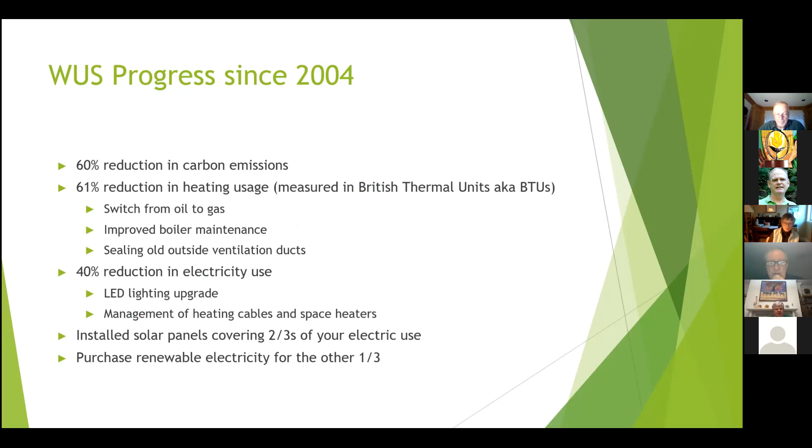Of course, you've got your solar panels covering about 2/3 of your electric use, and you've purchased green energy, 100% renewable, for the other 1/3. So great stuff. You already got the preview of that. So congratulations. Really terrific work you've done so far. So I hope you all feel very good about that and feel that the effort you've put into it has really accomplished a lot, because it has.

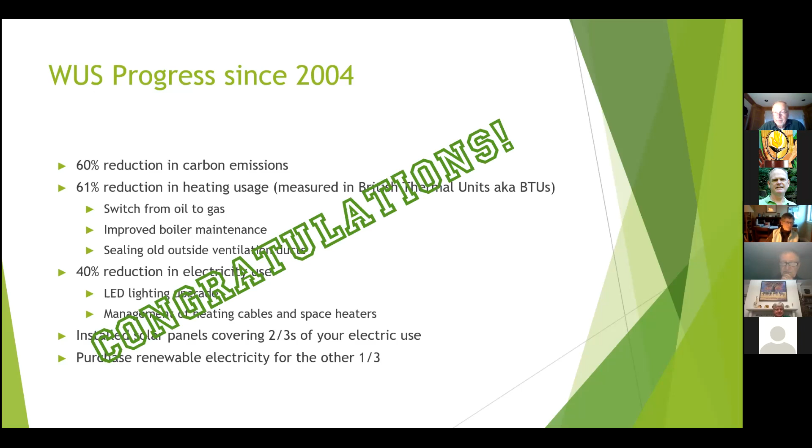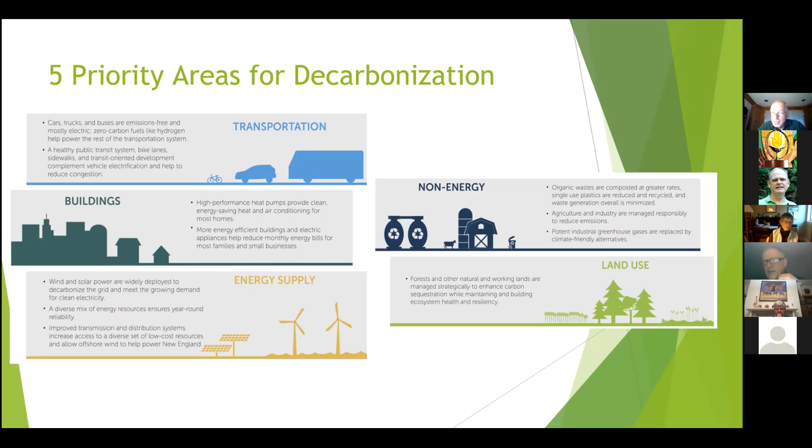And in the report, it specifies these 5 priority areas to focus on. How do we decarbonize transportation, buildings, the energy supply, non-energy uses like agriculture, and then how do we sequester carbon for that amount that we're not able to get 100% to renewable, but then we want to offset that by sequestering carbon or having more forests to take carbon out of the atmosphere, things like that.

So these key principles that apply across that: how do we transition all of these energy users away from fossil fuels and toward renewables? How do we get more efficient with our use of energy and flexible, so that, one of Governor Baker's real focuses is how to do this in a way that is affordable and doesn't hurt the economy. So his idea is let's have a little more flexibility so that we can find cost-efficient ways to do things.

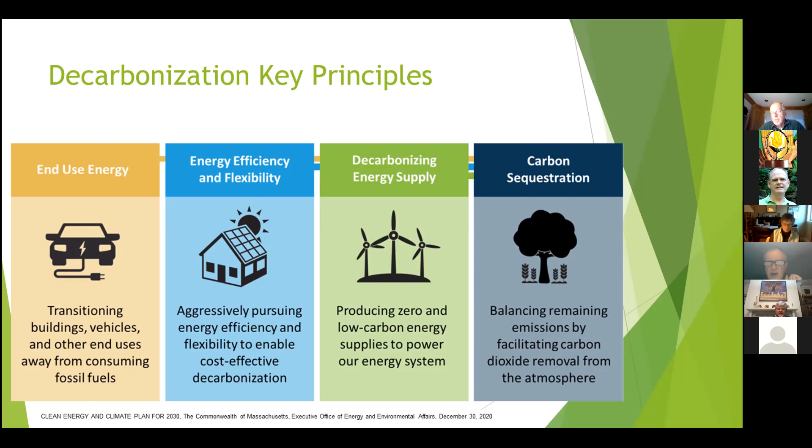Decarbonizing the energy supply. So the electric grid, going to low carbon energy, and the approval that the Biden administration gave to Vineyard Wind will certainly be a big boost toward that. That will be an exciting project. And then finally, carbon sequestration. So for whatever we're not able to reduce through all these other things, find ways to remove that carbon from the atmosphere, whether it's trees or whether it's a technology that extracts it and takes it out of the atmosphere.

And then, of course, we're going to focus mostly here on buildings. And in the report, it notes 27% of statewide emissions come from residential and commercial buildings. Key principles and actions here are the electrification of space and water heating, which the report recognizes as something that's low risk, cost effective, a solution that is in the market now and becoming more and more common. Investing in envelope efficiency, i.e. better windows, better insulation, so less of the heat leaks out of the building as you heat it up.

And to me, this was a really important statement. I'm seeing a lot of talk lately about things like renewable gas or biogas, and we read some about biomass plants and things like that. And I thought it was interesting and important that the Baker administration recognized that, yeah, there'll be some of that available, but there won't be enough in order to achieve the net zero goals. So for the most part, the use of gas for building heat needs to start declining soon, and decline very quickly.

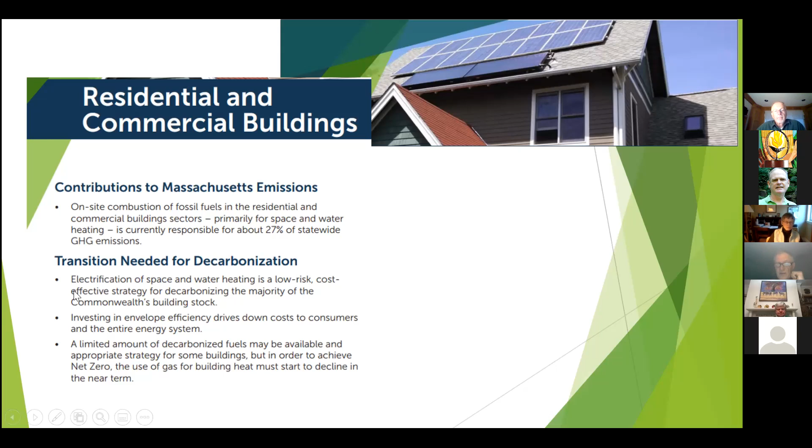And the end result of this is this vision of, I think, that world that the Unitarian statement also pointed to, where the air will be cleaner and healthier for everyone in the Commonwealth. Homes will be more comfortable and more efficient with this electric heat pump heating and cooling technology. Vehicles will become electric, reducing air and noise pollution. And all of this will create good jobs and give people not only a good paycheck, but I think a good purpose for the work they do.

I'll pause there before we get into things on the report. Any comments, questions, reactions to this direction that the Commonwealth's taking?

We're applauding it. We're not represented too well tonight, but a few of us and many others in the church are part of the Metro North node of 350 Mass Action. So they focus on state policy to accelerate environmental progress. And so many of us have met with state senators and representatives and written letters, in order to raise the bar, but also to promote policies that'll make it easier for institutions and individuals to actually meet the higher bar. And now we have that.

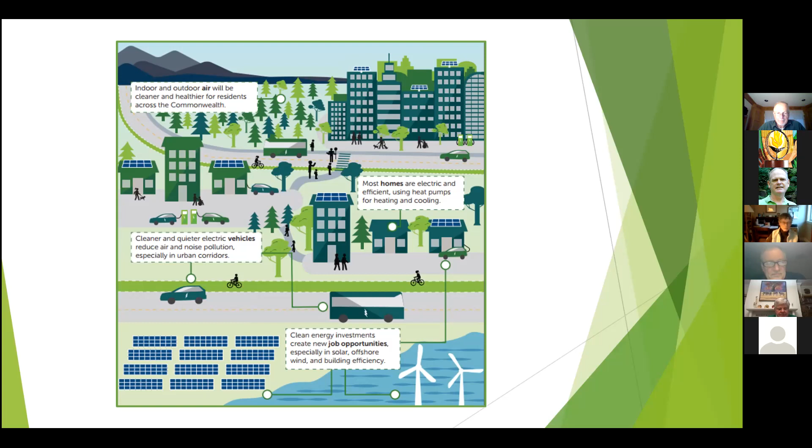All right, well, let's dive into some of the work that you did. And I guess either my agenda is out of order with my slides or my slides are out of order with the agenda, whichever you want to consider it. But we'll start on these short-term actions.

And it's been a couple of years anyway since you've had a Mass Save assessment. I'm sure you had one when you did the lighting upgrade, which I think was 2018 or 2019, and you can do them every 2 years. The Mass Save assessment will look at a narrower set of things, but there will be overlap with this report. And obviously it's necessary to qualify for the various incentives and rebates that the Mass Save program can give you.

So I know I was talking with Chuck. He was talking about looking at a more sophisticated thermostat and heat control system. So I encouraged him to make sure to get that Mass Save assessment and get some money from Mass Save to help fund that. The installation, Jim, sorry to interrupt, of those Wi-Fi thermostats started today. Oh, great. Well, go ahead. Exciting. Woohoo!

Just wanted to say real quickly on the Mass Save assessment that some people say, well, we had that a few years ago. Why do we do it again? The program changes and the amount of money they give you for different things changes. And sometimes there are new incentives that didn't exist. So it's a really good idea. I know people who have quadruple dipped, have had Mass Save audits 4 times and gotten money each time. So those are good reasons.

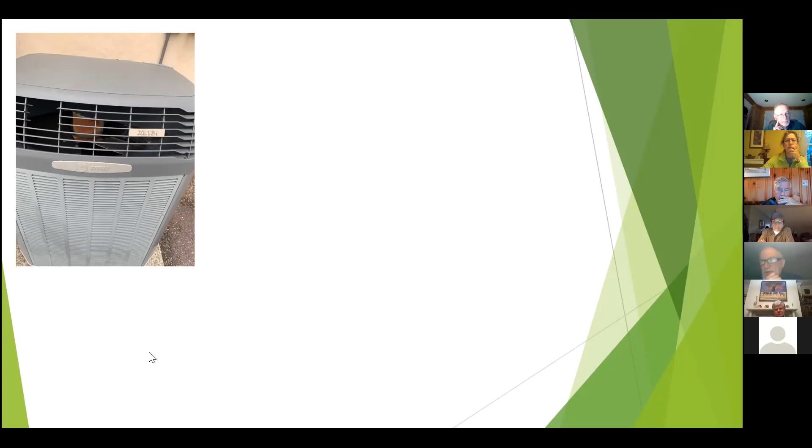Well, let me take a look at a couple of things here. Here is your air conditioning unit that sits outside the office on the parking lot there, where you can see some rust. You can see some broken grates and things like that. The best I could determine, it's an old enough model that it doesn't show up in a lot of the databases where you typically can look these things up. So I think it's about a vintage 2004, 2005 item. So it's done its work. It's served you pretty well, I guess. So a good time to start thinking about that replacement.

So if the window is 47 degrees, and as you know from the laws of thermodynamics, heat flows to cold, it is basically pulling the heat out of the building to the outside. And so that's where those window inserts put in another layer to slow that down.

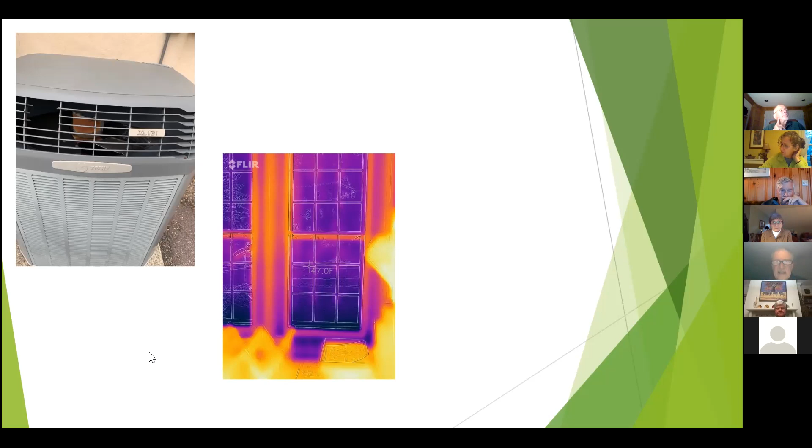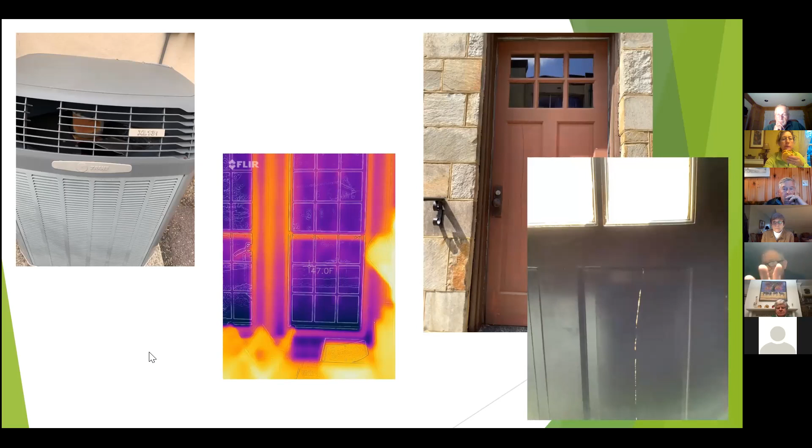Here's that music director office door. You can see a crack right in it. And when you look at it from the inside, you can see the light coming through that crack. Again, a fairly easy project to get a nice new fiberglass door. We actually just replaced old wooden doors at St. Dunstan's this winter. And you can even get ones that have those little windows at the top. There's all sorts of great styles available for that. Or certainly put some caulk in that crack and some weather stripping around; that would also help a lot.

Or here at my house, I just replaced an air conditioning unit that died on me with a heat pump. And I ended up just putting it through the ducts. So I have the heat pump outside. It goes up to an air handler in my attic, just like my old system did, though it's a new air handler that's compatible with the heat pump. And then the heating and cooling is distributed through the existing ductwork. So then you don't have to worry about any of these ductless units.

And in the office, it appears that there is access to the air handler from the minister's office. We didn't want to disturb the office too much, so we didn't move furniture around to go in there, but there is a door there that was open a little bit. I was able to peek in and see that there's some ductwork and things in there. So I think the ducted version is potentially useful for you as well.

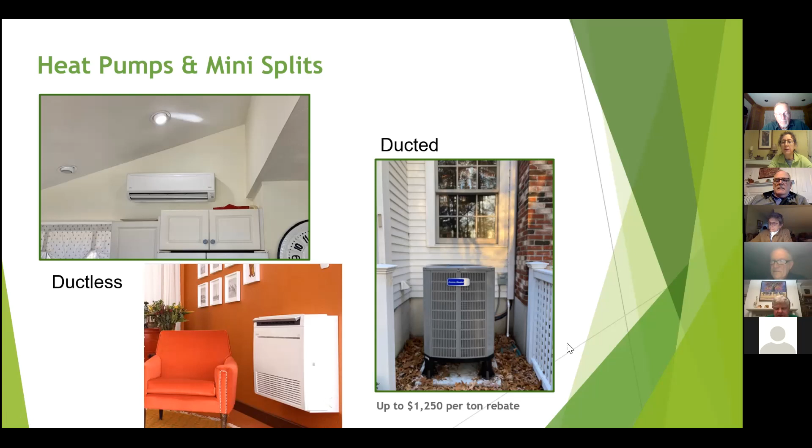Do you want to get to the big 2 or 3? Sure. Oh, but the last one here, because this is simple. I would ask Pegasus, I mentioned in here, have Pegasus just check that all of your panels and all of the microinverters are functioning properly. When I looked at the year-by-year production of solar, you can see these first 3 years, good solid 21 to 22,000 kilowatt hours a year. Then all of a sudden it drops to 20, and it stayed in the 20s. And I don't know what happened, but this year 19,580.

And there's basically 2 reasons that the kilowatt production of solar panels fluctuates. One is shade. If trees grow up over the years and put more shade on the panels, that will lower production. Not a problem that you have on your panels. And the second thing is, largely, snow. If you have a really heavy snow winter and the panels are covered for a long period of time, like at my house and even at the church, February was pretty snowy, so it was not a good production month. But I look at 2014, 2015, that horrible winter, we had like 8 feet of snow and you had pretty solid production. But it's never recovered. So I would just have them check on that.

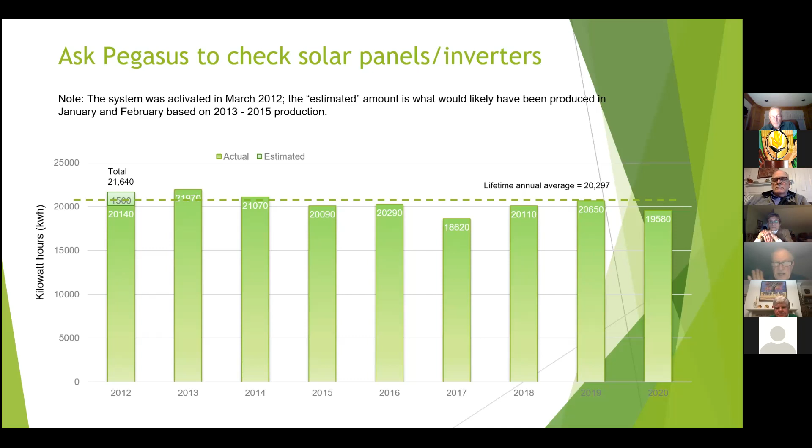Anyway, so let's talk about the big projects, what I call part of your net zero plan. And project number 1 will be replacing that steam heating system. Steam is inherently inefficient because you're always heating water to 212 degrees when, like this month, when it's 50 degrees out, you need a little bit of heat, but you don't need to heat water to 212 to get the amount of heat that you need. And a hot water system, you can vary that temperature.

But steam systems are quite complex. There's a lot of moving parts. You've got to blow them down. You've got to pay attention to the steam traps. All of that requires regular maintenance. And if it's not maintained well, it very quickly loses efficiency. And the boiler is about 20 years old, circa 2000. They typically have an expected useful life of 30 years. Which is not to say it will die when it turns 30. It might go to 40. And we certainly, at Mass IPL, see equipment that is 40 and 50 years old. But it certainly doesn't get any more efficient as it gets old.

So the moral of the story here is this is a good time to start thinking about this replacement. No huge rush to do that. So you have time to do some of the investigation, to see if the state comes up with more incentives, to engage a building science professional or mechanical engineer to help you think through the exact specifications of what you'd be looking for and how heat pumps will or won't work in the church.

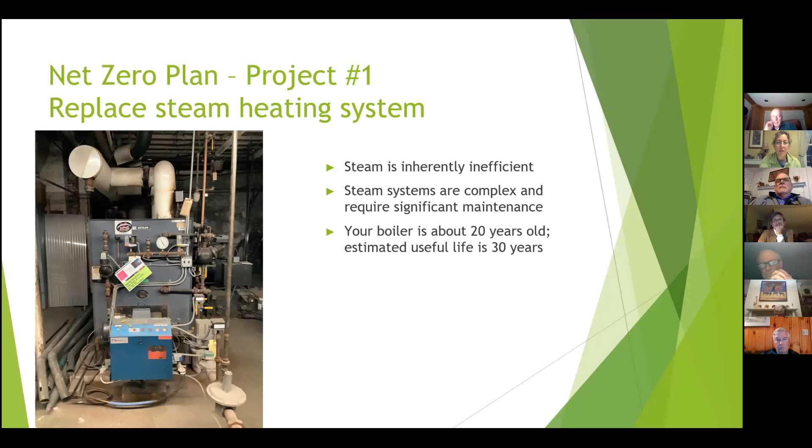So that's one. The other big one was a deep energy retrofit of the religious education wing. Here I have a picture of one of the windows in one of the classrooms, single pane, these aluminum frames, and then the infrared picture on the right there that shows that those aluminum frames, aluminum being a great conductor of heat, at 40 degrees. So again, if you're trying to heat that room to 65 or 68, those aluminum frames and those windows are just sucking that heat right out of that room.

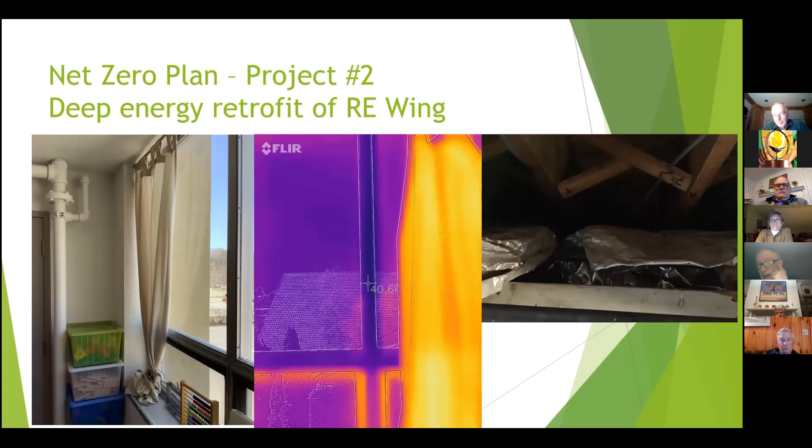And then the picture on the right here, up on the 3rd floor in one of the classrooms, there is a hatch that Chuck helped us open up so we could get up there. And you can see there's basically no insulation. Couple of inches of fiberglass with this foil kind of wrap around it. As we looked around, it's old. It probably wasn't installed very well to start with because this was built in the 1950s, and in the 1950s, who cared? Energy was cheap. But obviously a lot of room up there to add insulation as well.

But when I say a deep energy retrofit, it would involve potentially a couple of things. And again, a building science firm, and I mentioned a couple in the report, would help do this analysis, where you would do that insulation in the roof that I just showed you, but you would also add exterior insulation. And I think, Chuck, I sent you another This Old House video or two, where a couple of years ago they did a house in Jamestown, Rhode Island, and did a pretty deep retrofit and then added onto there. And they showed putting this insulation on the exterior of the building. The good thing about that is it's much less disruptive. You're not opening up walls on the inside and tearing out plaster and things like that.

But also, it's a really, really effective strategy to prevent what's called thermal bridging, where, not so much in this building, but in a building that has typical wood studs, those wood studs are pretty good conductors of cold. And while you may have fiberglass or cellulose in the wall itself that has a good insulation value, those studs are still conducting that heat out of the building more effectively. You have exterior insulation, it stops all of that. And then it'll be pretty easy, Jim, to apply and then refinish it.

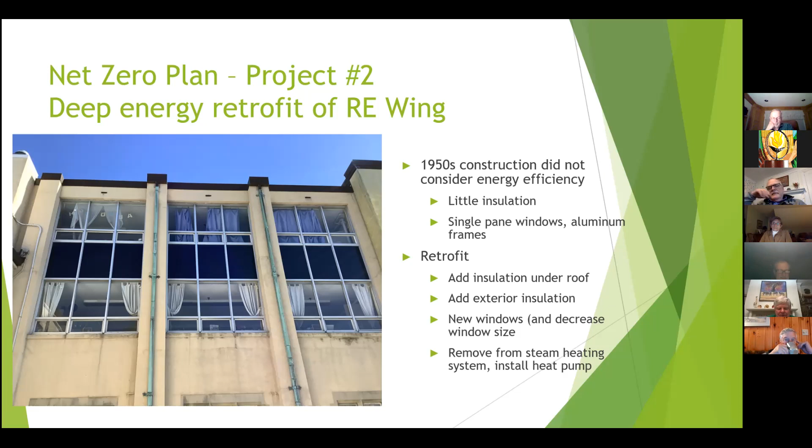I built this as an hour-long meeting. Obviously, we've stretched the timeline for some people. Are there questions that haven't been asked? We do have some comments in the chat room. I don't know how I get those to you. Is there a trick to it? Oh, you could probably open that. Yeah, okay, yep. It's mostly appreciation. There was the question that Fritzie asked about, did we have a spreadsheet on the costs and payback for each of these items? And the answer there was no. But it's mostly appreciation. Yep.

I guess the third thing I thought you might have on here: you had the big project with reconsidering steam heat, either going to the hot water or heat pump approach. Then you had treating the RE building as a separate building, really tightening it up, and then letting electricity heat pump heat it. But the third one I wondered about is looking at our solar capacity and when to increase it. Yeah.

I don't think that's a big priority for you, because again, I'm looking at this as what is your path to net zero? The vast majority of your carbon footprint is that steam heating system. So, should you spend another $50,000+ replacing and upgrading your solar panels, or should you put that $50,000 toward the replacement of the boiler? If you look at it as cost per ton of carbon reduction, the boiler replacement will have a bigger payback.